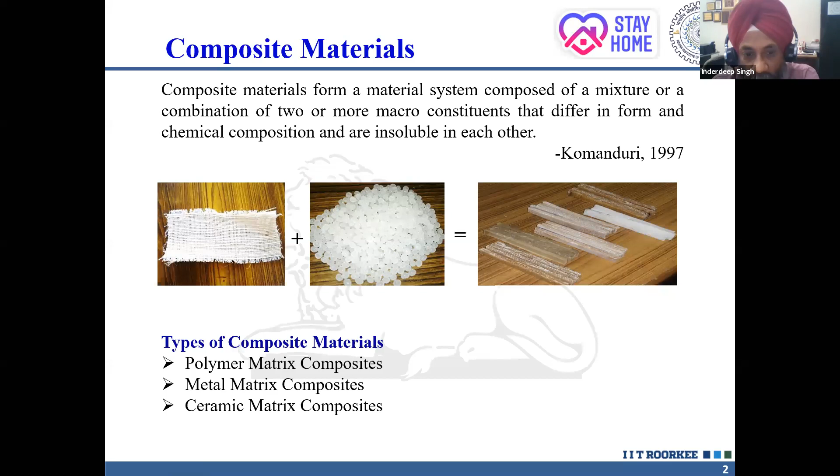So our talk is related to polymer matrix composite, and as I told you, there will be a reinforcement and a matrix. Matrix is of three types, that is polymer, metal, and ceramic. Reinforcement can also be of different types: continuous fibers or short fibers. So for any composite material, we will have a matrix and a reinforcement. Since our focus is on polymer matrix only, we have further classified the matrix as thermoset matrix and thermoplastic matrix. We can choose any one of these, and the reinforcement can be carbon, glass, and Kevlar.

Now the problem here is that the composites that we make from here are going to be synthetic, meaning artificial composites, because the polymer is non-biodegradable, not environment friendly, and the fibers being used as reinforcement are also not environment friendly. So this is a big challenge: how to convert these synthetic fiber reinforced composites into natural fiber reinforced composites that you see on your screen. So we are now trying, at IIT Roorkee, to develop natural fiber-based composite materials.

So we can either have partially green composites or fully green composites. Fully green composites will help you to get fully biodegradable materials. For example, there are already flower pots available. The flower pot has a sapling of a flower plant. You take it home, you dig and put it there. This plastic body of the flower pot will automatically degrade into the soil. So that is the concept with which we are working. These materials are already available, but there is still a lot of opportunity to work in this field to bring them into the structural domain, so they can be used for structural applications.

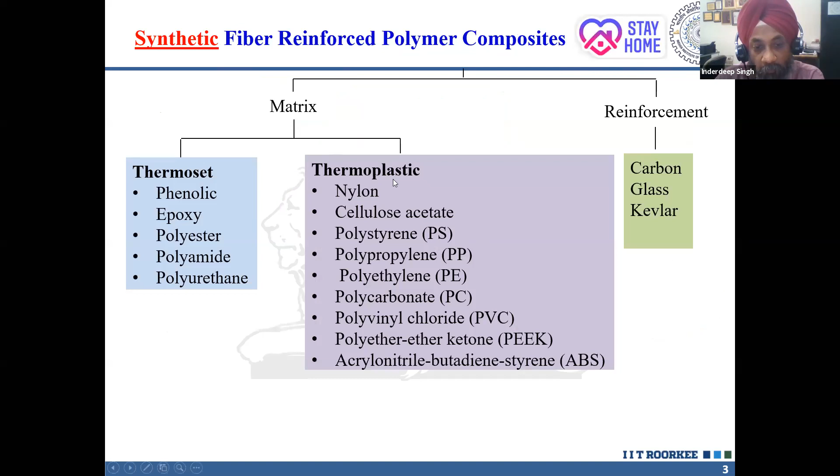So therefore, we have fully green composites where natural fibers are used with biodegradable polymers, and partially green composites where you have natural fibers in non-biodegradable polymers. All the polymers mentioned in the previous slide are non-biodegradable. So if you have a non-biodegradable polymer and you use natural fiber as reinforcement, at least you are reducing some burden of plastic on the environment. So we call them partially green. But if your polymer is also green, that is, it is a biopolymer, and the fibers are also natural, then you can develop fully natural fiber based biopolymer composites which are fully green.

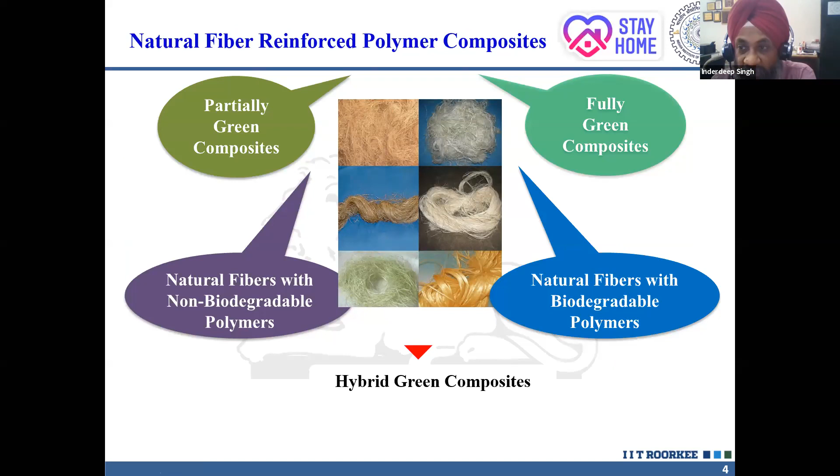So this will further explain the concept. You can see you have synthetic fibers and non-biodegradable polymers. So if you blend them, since for every composite material there will be two things: one will be the polymer, the other will be the fiber.

So fibers are also synthetic like glass or carbon. Polymer is also a thermoset or a thermoplastic, but it is again synthetic. So if you combine the fiber and the polymer together, you will get non-biodegradable composite. But if you combine natural fibers with biodegradable polymer, you can get fully biodegradable composites. So the trend is towards moving from non-biodegradable composites to biodegradable composites, but this may not be a very smooth transition. It can be slowly, step by step.

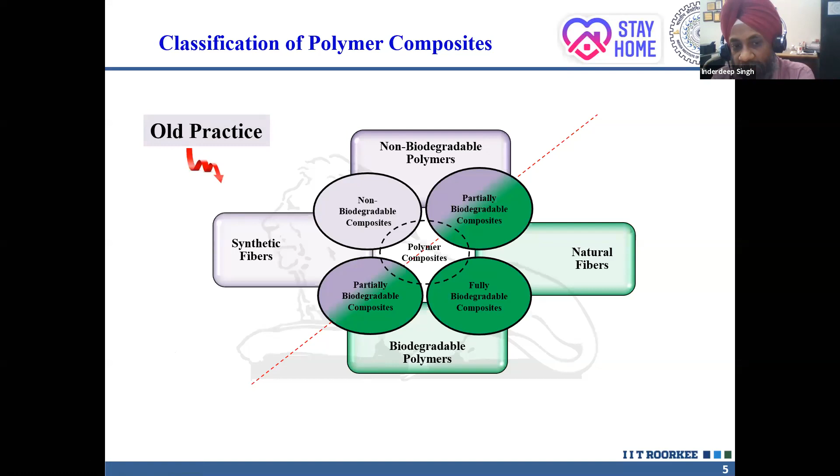So this was the old practice. Most of the aircraft parts that are made by composite materials use the synthetic fibers like glass and carbon, and they use polymers like epoxy or polyester or polyether ether ketone. So different types of polymers are used and different types of synthetic fibers are used, but the main challenge is the biodegradability or the decomposition or the waste disposal of these materials.

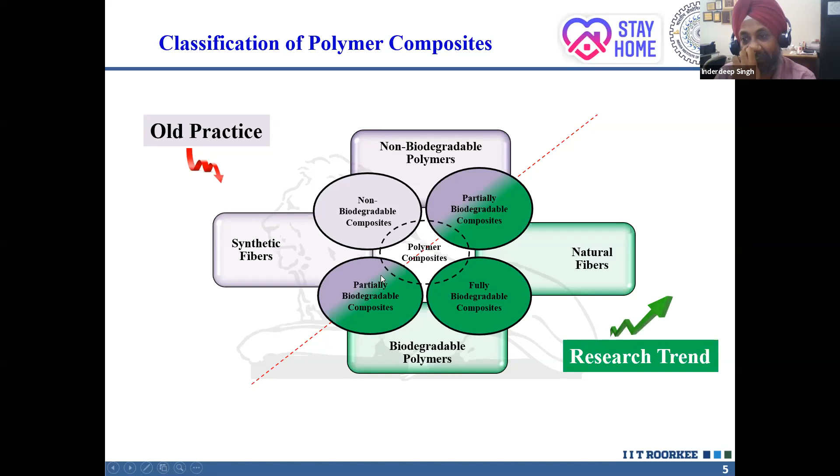But slowly now the trend is towards the fully green composites. So this is the research trend, and we at IIT Roorkee are also focusing our attention in this direction. So these are some of the machines that we have. Very quickly, I will share the information with you. Then we will jump on to the main topic, that is drilling. Already, I think I have spent around 18 to 20 minutes.

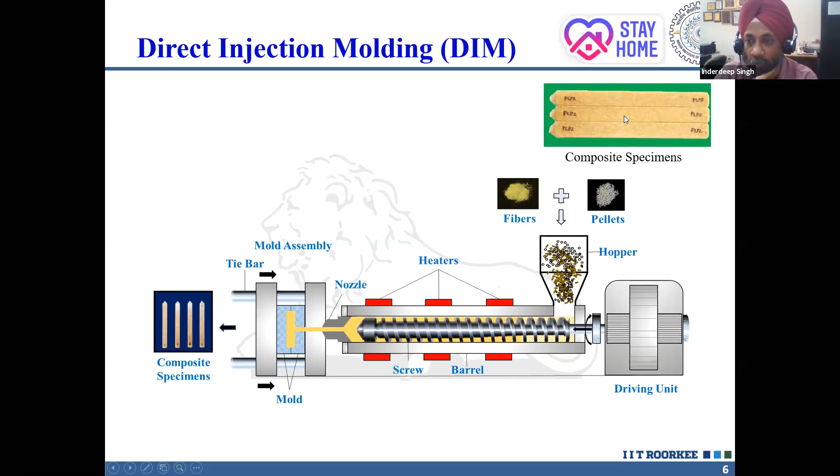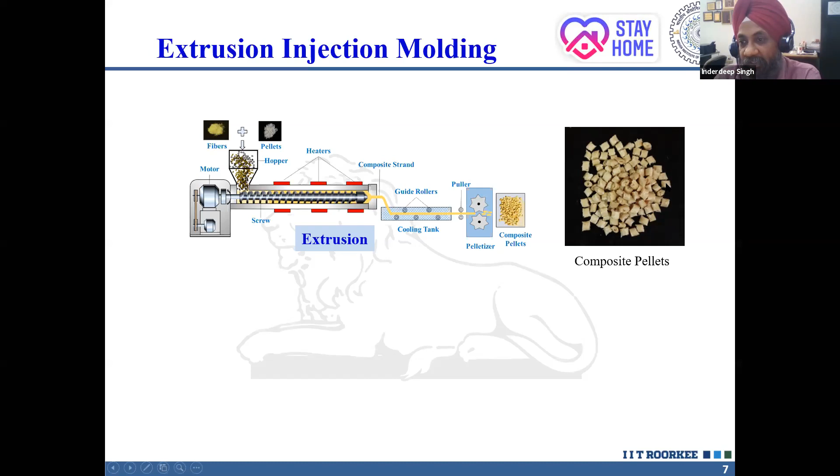Now, why this is also related to CNC programming, because here also there is a controller and there are codes in the injection molding machine that we have to program so that we are able to properly select the mold opening time, mold closing time. We have to see how much temperature we have to set, and the barrel is a long barrel, so we have to establish a temperature gradient in this barrel. So at different sections we have to control the temperature, and we have to define a temperature profile through which these pellets will be melt blended once again into the composite specimen. So it is also related to control. The control procedures are again the numerical controls only. So extrusion process is more of a manual controlled process, the machine that we have, but injection molding is controlled through a controller.

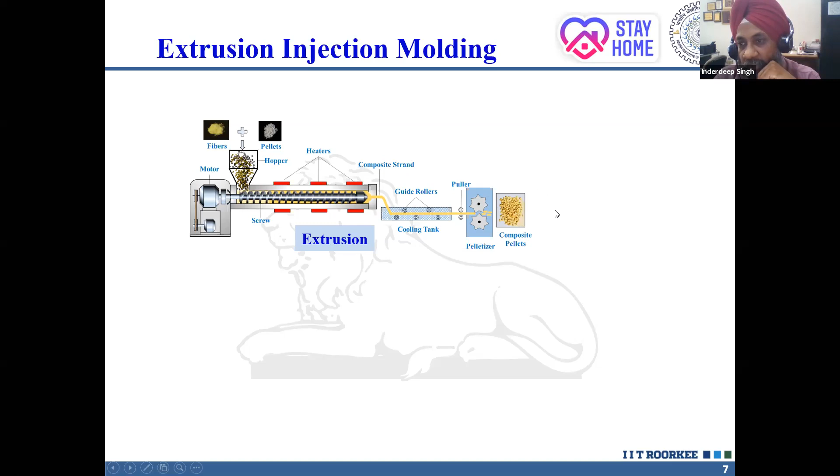So in extrusion injection molding, we extrude and pelletize, and then use the pellets as the raw material for the injection molding machine. Whereas in compression molding, we collect this composite strand in a preheated mold, and then that mold is taken to the compression molding machine and we compress it under temperature and pressure.

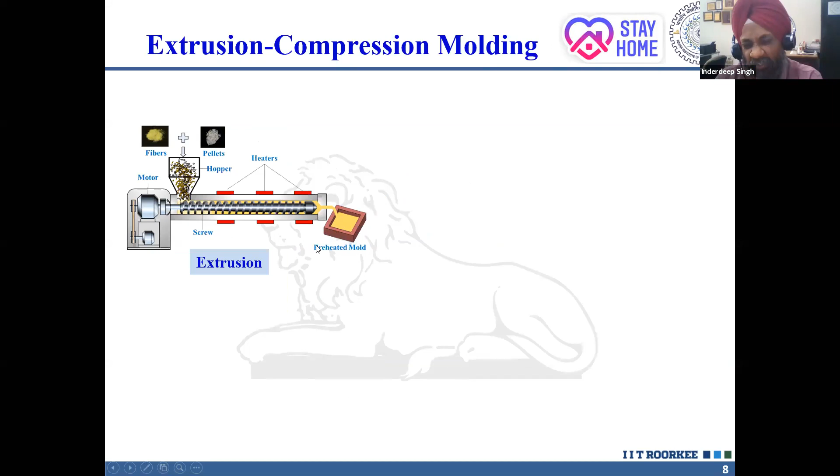So quickly I'll take you to the next slide. You can see here there is no cooling arrangement, there is no pelletizer. The composite strand being extruded is collected directly in a preheated mold, and this mold, sorry, this is extrusion, will be taken to the compression molding machine here.

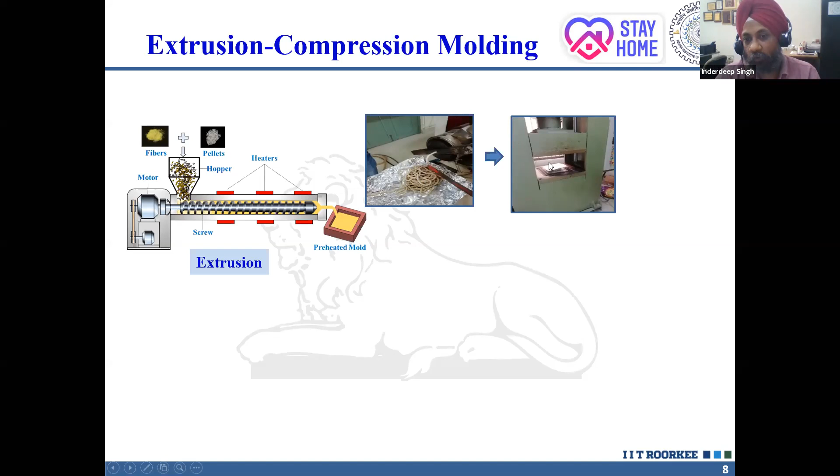This is the material coming out of the extruder, and it is collected in the preheated mold. So this already has fibers and polymers. This is taken to compression molding. We compress it under prescribed temperature and pressure, and finally we get a composite plate like this.

You can see further, this is the mold. Schematically, this mold is directly transported to compression molding, and here the material is compressed under pressure and temperature to get a composite plate like this. So till now, in the 20-25 minutes, I have explained how composite materials can be made.

Once the composite materials are made, they will be used for certain applications. Suppose this plate is made; it can be used for an electrical board, which is normally made of wooden waste or wooden powder. So it can be used for such laminates, or as the back support of mementos. As you can see behind me, there are a number of mementos using wood. This material can easily replace the wood, and any colored printing or golden patch can be pasted on it by cutting a slot. So these materials are now going to be used for specific applications.

But once you use these materials for specific applications, you need to cut them and make holes in them so they can be assembled properly. That knowledge is still being developed, how to make good quality holes in composite materials, because it is not always easy to make holes even in metals; there are many high strength, temperature resistant metals in which cutting is a problem. For example, making holes in titanium or Inconel is difficult. So different processes like EDM or ECM can be applied.

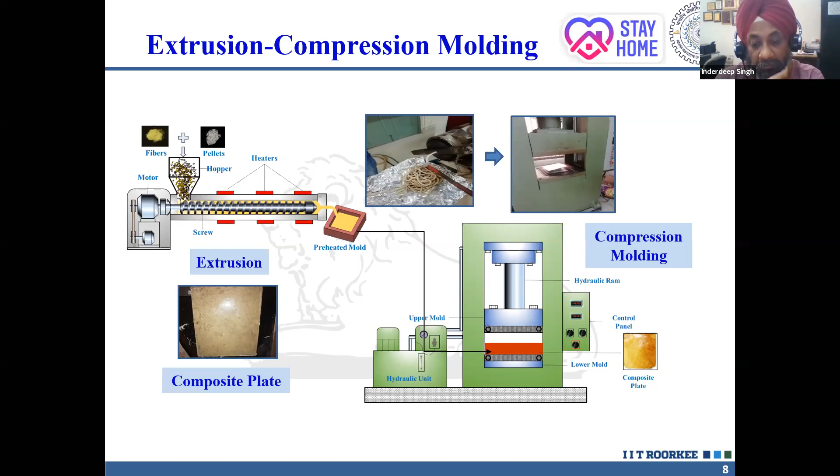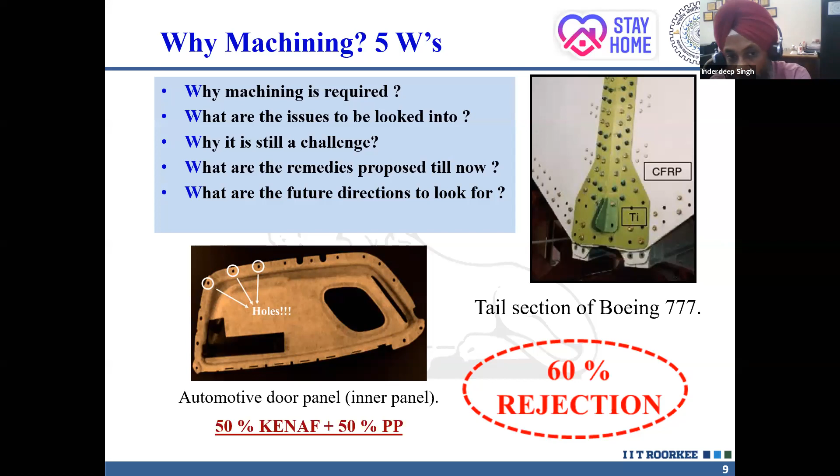Now, making of holes in composite materials is a big challenge. Why? Because as you can see, composite materials are anisotropic. Their properties are different in X, Y, and Z direction. Why? Because the fibers are running in one direction, they're running in another direction, and in the third direction, the Z direction, we have different layers of composite material. So normally in the aircraft industry, laminated composites are used.

Maybe to just have a break, I will show you. I have one sample here. You can see there are different layers which have been stacked together to make this composite, and if you see it closely, I will show another one. You will be able to appreciate this is a composite material, and if I bring it closer to the camera, you will be able to see that there are fibers running in both directions. Fibers are in the longitudinal direction and also in the transverse direction.

So it is light in weight composite material. So you can appreciate the fibers running in both, and in the Z direction through the thickness, there are different layers of the composite. So you have different layers and you have fibers in both X and Y plane. So therefore, making of holes in these materials becomes a challenge because of the anisotropy.

Second is the properties are different. In the very first slide in today's session, I told you that there are the macro constituents, that is the reinforcement and the polymer, both have chemical properties different from each other. Their physical properties are also different, their thermal properties are also different. So how they will behave under the application of temperature is also different. So therefore, the difference in the properties of the constituents is also a big challenge.

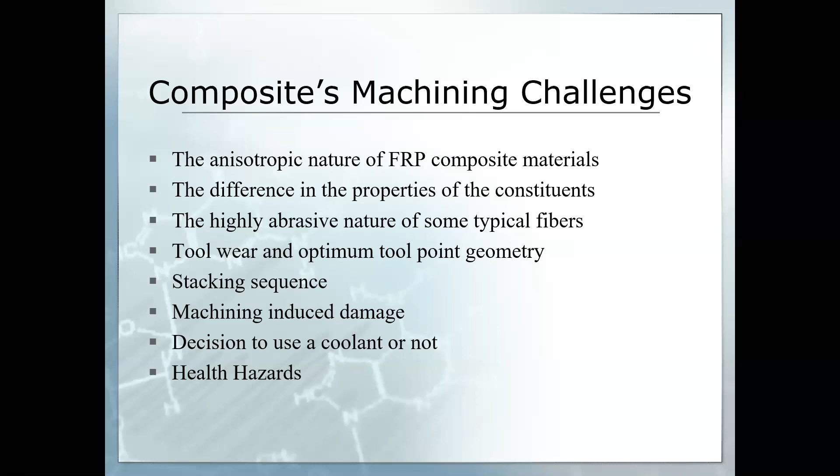So once the designer provides us with the design of the composite material and the stacking sequence is known to us, then we have to first make the laminate, and then we have to make holes in it so that it can be assembled to any other metallic or a non-metallic part. And at that time we will encounter that there is a lot of damage that is happening. So now I am introducing the second point that we are going to talk about.

First is the composite material, second is making of holes in composite material, and third is how we have tried to solve this problem using a knowledge based approach. So the other two parts I will skip because they are not that important.

First is the decision to use a coolant or not, because here you will not experience a lot of temperature rise, as well as you will not use a coolant for flushing out the chips. So normally we have to decide whether to use a coolant or not, because polymer is also a form of a chemical only, and the coolant will also have some chemicals, so there may be a chance of reaction between the two. And similarly, there are health hazards also associated.

When I told you that once you are making a hole in glass fiber based composite materials, the dust may fly after the cutting action, because the chips that are produced are normally in a very powdered form, so there are chances of inhaling that, so that is kind of a health hazard. All these are the challenges which we have to see and we have to address.

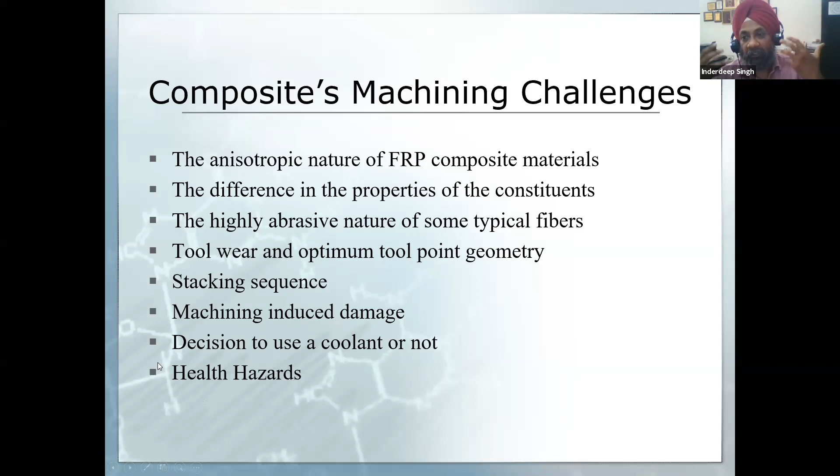Similarly, if we are talking about a CNC machine, we have a cover board or a door which will close, and then the action will take place. So automatically it will take care of the health hazards. So now none of the dust will fly, so the worker will be safe, especially in case of CNC machines. So these are further the challenges as the summary of what we have already done.

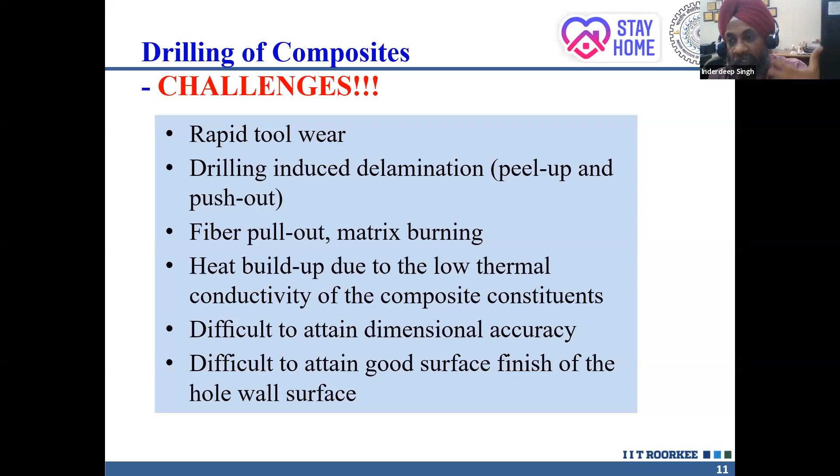It is difficult to attain dimensional accuracy because of the fiber pull-out and sometimes chipping of the matrix, which is brittle in nature. That can also affect attaining a very high dimensional accuracy in the holes that are produced. And the surface finish of the hole wall is also sometimes a challenge, because the fibers are protruding out from the hole wall and we are not able to get a good quality hole.

So whatever I have been speaking, this is a very important slide to explain that. You can see here that, as I told you, composite materials are normally made in layer by layer form, stacked up one on top of the other. I have already shown you a laminate like this. I will bring it close to the camera. You can see that there are 4 layers in this. May not be clearly visible, but this is the width, this is the thickness, and this is the total length of this sample. So you have different layers in this, which are depicted on the screen.

These are the layers. So once the drill tends to enter this, the top layers tend to peel up because of the drilling force action. So with the peeling up action, when the drill is trying to enter into the plate, the top layers tend to open up. That is called the peel up type of delamination.

Now why is the word delamination coming? Because we have laminated different layers together. One layer, second layer, third layer, fourth layer, fifth layer, sixth layer. So we have stacked up the layers. So we have taken suppose 6 layers and we have laminated them to make a laminate. So once you try to make a hole, the top layers may tend to open up. So that is called the peel up type of delamination.

But the major challenge is the push down type of delamination, when the drill tends to exit from the laminate. The bottom layers try to open up under the thrust force that is exerted by the drill on the laminate. So therefore, once this delamination takes place, bottom layers tend to peel down or push down. Due to push down delamination, it is reported that 60% of the holes are rejected.

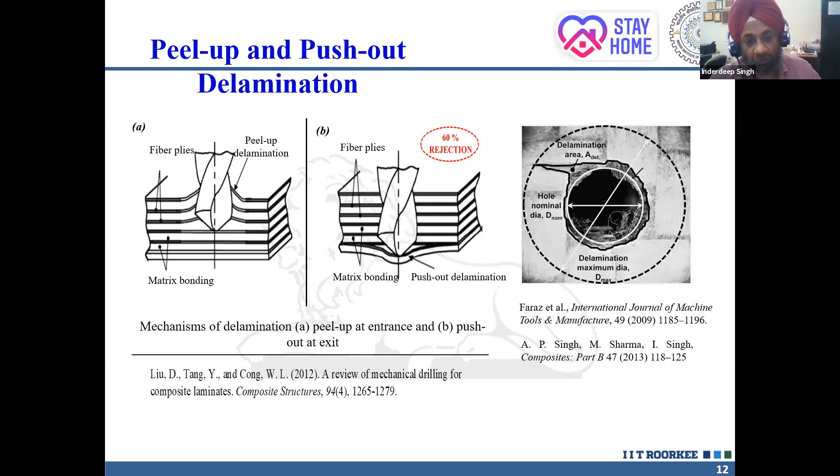The thrust force will be recorded through the setup that I have told, so that continuously the dynamometer will keep on recording the thrust force and the torque, and in the controller this thrust force will be compared continuously with the critical thrust force, and we can fix a limit that the thrust force recorded during the making of hole in the composite material must not exceed a value 20% lower than the critical thrust force.

Now suppose the critical thrust force is 100 newtons. I am just making a guesswork. Critical thrust force is 100 newtons, as we have calculated using any of the critical thrust force models. It is already inbuilt in our controller. Now continuously when we are making a hole, the thrust force is being recorded, and suppose the thrust force recorded is 78. No problem, the process will continue.

But as soon as the thrust force reaches 80, we have pre-programmed it that automatically a feedback signal will be sent by the controller to the feed control mechanism in the machine, and the feed rate will automatically be reduced. So it will be a closed loop feedback system in which your thrust force generated is controlled against the critical thrust force, and as soon as it reaches the level 20% below that, automatically a signal is generated and the feed rate is adjusted automatically.

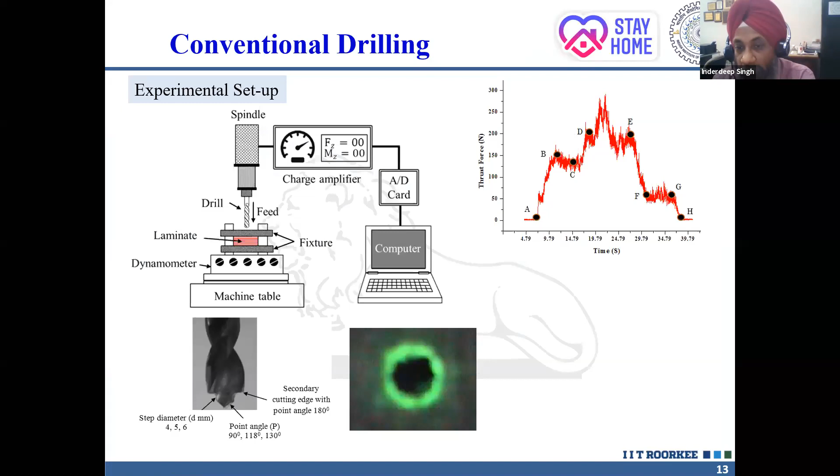So therefore, again I'll go here, what are the approaches people are trying. They are trying to optimize the cutting speed and feed rate, they are trying to optimize the tool geometry, and theoretical modeling is being done. Critical thrust force models are being developed, which can be used as a reference to control the feed rate and speed during the cutting action using the CNC machines.

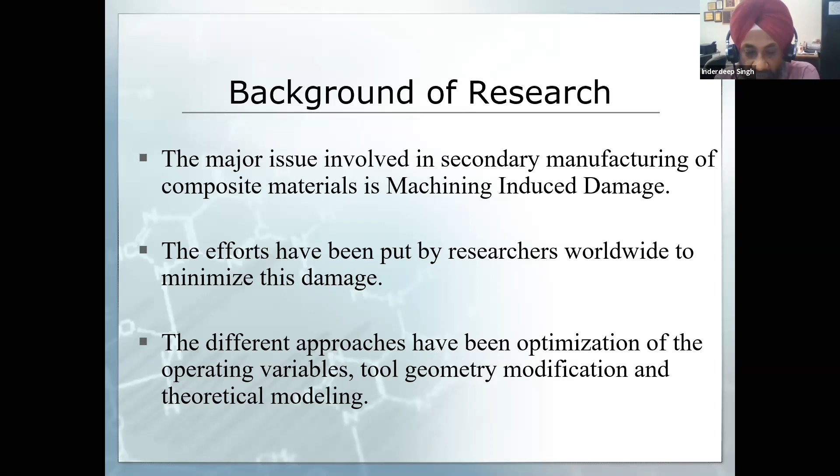That facility is not available with our conventional machines, because in conventional machines, once you set the feed rate, all through the drilling cycle the feed rate will be constant. But in a CNC machine you can program your cycle in a way that initially the feed rate is different, and towards the end of the drilling cycle the feed rate is different. We can have a variable feed rate throughout the drilling cycle. So, again I have told you, different drills we have used, parabolic point and four facet, but how to avoid damage already I explained.

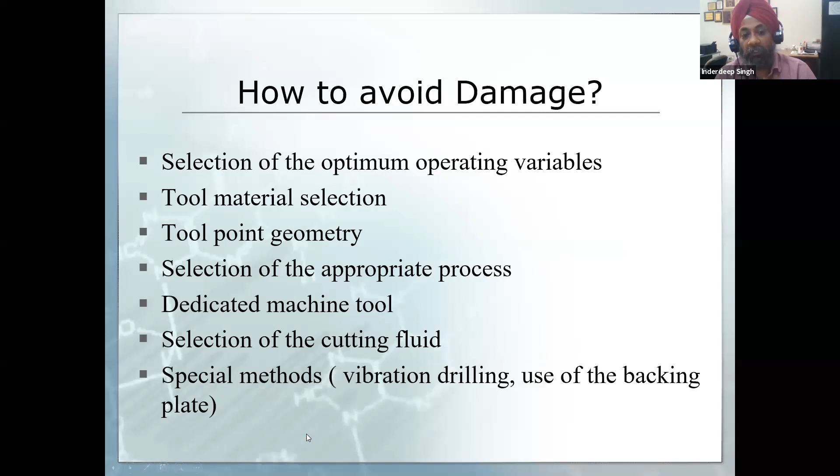So what is the need of a knowledge base? Now research efforts are there, but their efforts are such that somebody has selected a specific fiber, a specific polymer. For example, the researcher has selected polyester as the polymer, and glass fibers as the reinforcement. He may use hand layup process to make the composite plates, and then make holes in those plates, record the forces and explain the trends of the forces, optimize the drill point geometry, and publish a good paper in a good journal.

So that information is available through the journal, but that information is specific to that experimental domain which was followed by that researcher. The fiber was limited to glass fiber, the polymer was limited to polyester, the cutting speed and feed was also in a specific domain, the tool point geometry was also limited, it was one or two only. So the same results cannot be directly applied to any other material. Suppose I keep the glass fibers the same, but I change the polymer from polyester to epoxy, all results will change. So the efforts that have been reported are segregated.

You have different pieces of information available. So efforts are largely distributed, but they are successful. So many times, suppose somebody starts to work in this field, he will spend a lot of time reading about all this literature and then compiling the information. So what we have tried to do, we tried to create a knowledge base.

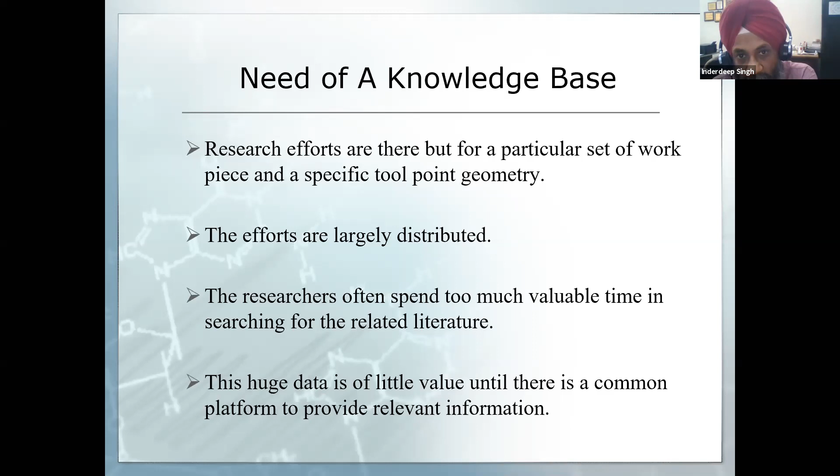So the efforts are largely distributed. The researchers may often spend a lot of time searching the related literature. So this huge data is of little value until there is a common platform to provide the relevant information. So with this objective, we developed a knowledge base to help engineers and scientists with their specific queries related to feed rate and cutting speed.

For example, maybe many of you may ask a question towards the end of my session, how to select the feed rate and cutting speed. So if you put a specific value of feed rate and cutting speed as per the levels or settings available on your machine, this knowledge base will be able to predict what will be the forces generated if you are able to correctly specify the material.

So you specify the material and you give your tentative feed rate and cutting speed, and it will tell you the forces and the delamination factor. If the delamination factor is very high, you can then try to reduce the feed rate and do the iteration. Maybe in 3 or 4 iterations you will be able to get the delamination factor within the limits, as well as the forces also within the limit.

And if your query is matching directly with one of the research papers that is already available and is one of the important pieces of information in the knowledge base, the system will automatically show the reference for that detailed study. I will show you 2 or 3 case studies with the input and the output from the knowledge base.

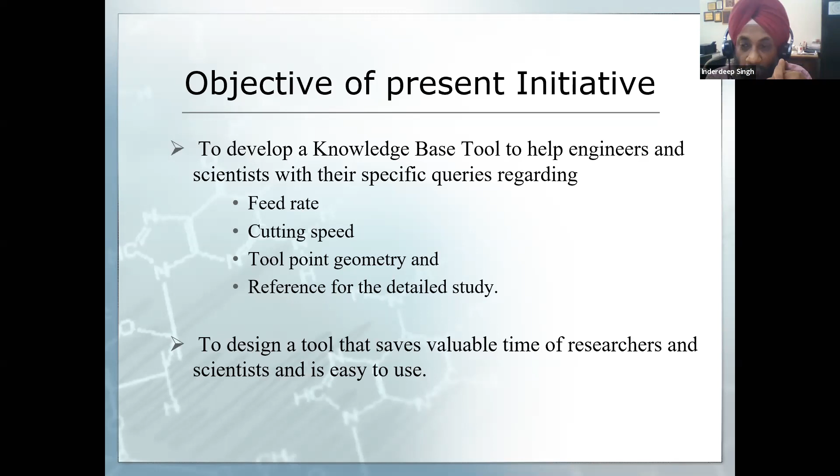So the basic idea behind this knowledge base is to provide a ready reference for the users, so they can directly use the information they have, and the knowledge base will help them take a judicious, right decision related to the optimal selection of the operating variables. So it will save a lot of time for the workers, but the main emphasis of this tool is it must be precise, accurate, specific.

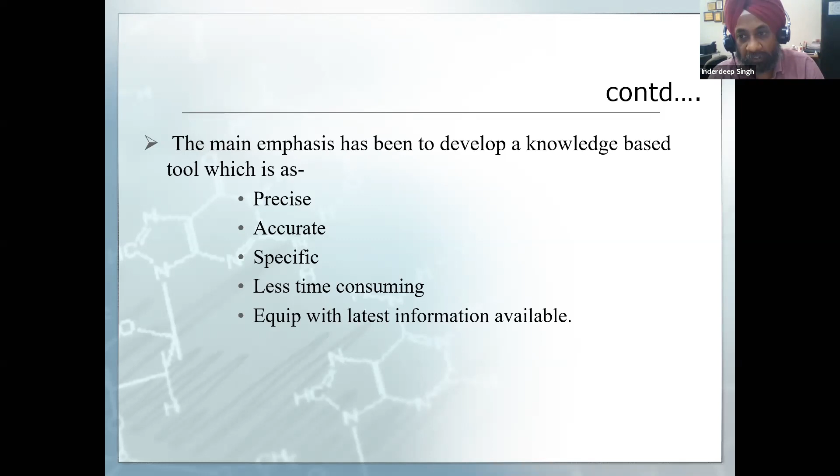Maybe you input your information now and get the output after 2 hours. Nobody is going to wait for 2 hours. Therefore, it must be immediately able to predict the values, and be equipped with the latest information available. So it must be open source, so that as new articles are published and new information is generated, it is updated in this software. So with these objectives we developed it.

The knowledge base was developed a few years back, and now the research scholar who developed it is working as a director in one of the institutes. He used C++ as a coding tool, and all the information was available in the form of data sheets, which were integrated in the program, and then it was able to do the predictive modeling of the drilling of composite materials.

The second point is important because in many cases, in the research papers, you will get an x and y graph. On the x-axis is suppose feed rate and the y-axis is thrust force. So they have not specifically given the values.

So in that case, we used Corel Draw, which is an imaging software, and we were able to extract the values of the thrust force related to the feed rates given on the x-axis from these figures in the different journals, and we were able to use them and integrate them into the knowledge base.

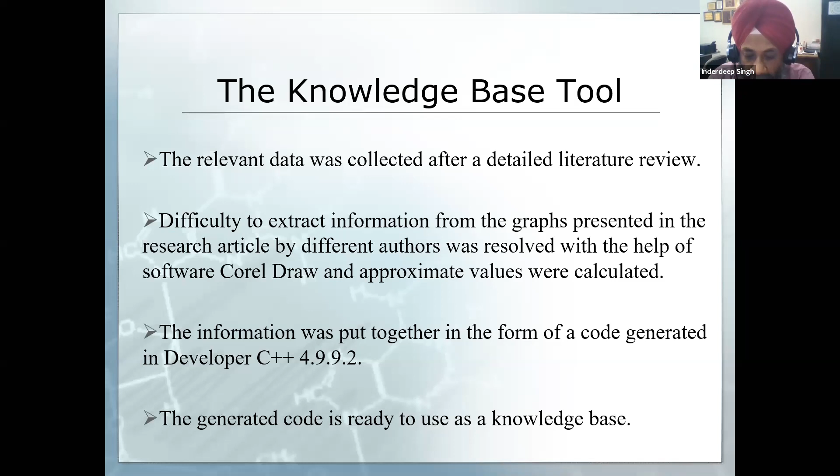Now this is how the knowledge base works. This is I think the last part of my talk today, how it will work, and the 2 or 3 case studies I will be able to share with you on how this knowledge base works.

But before going to that, how it is useful: it can be integrated with the controller of the machine where the person is going to give the various settings. So before giving the settings in the controller, he can just try the iteration and find out what are the best settings in the controller itself, and then once he locates the best setting, he can put the same values for controlling the process or for undertaking the process.

For example, feed rate, he can just see what will be the optimal feed rate based on this database, see the cutting speed which is optimal for minimum damage, and then use those values in the program. And this will be a kind of feedback for writing the program, that you get your information from this tool and then use that information for writing your program.

So how do you do that? In step 1, it will ask the user whether the process that he wants to undertake is conventional or non-conventional. So we have some papers already available on non-conventional machining also. Then it provides options for drilling with special conditions, like drilling with the exit backup plate, under cryogenic conditions, or vibration drilling. So it will ask you whether you want to do a normal drilling or you want to put

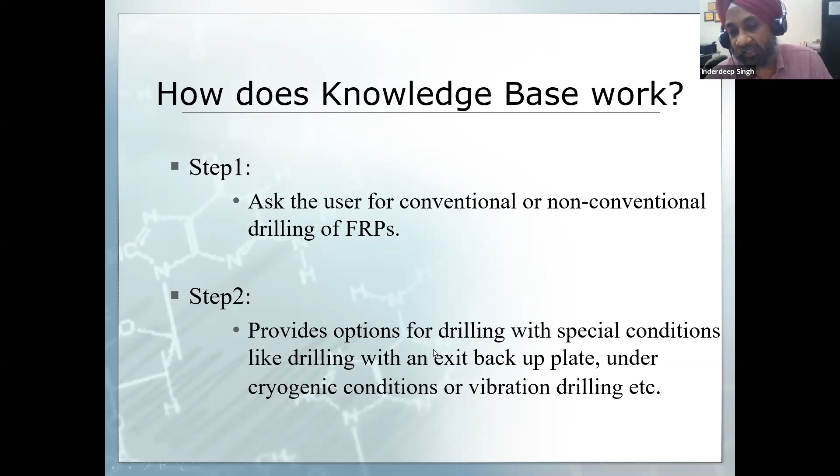So the software will ask you whether you want to do conventional or you want to put an exit backup plate also. Then the material: it will ask what is the material, what is the type of fiber, what is the matrix material, what is the tool you want to use. As I told you, there are 18 to 20 types of drill point geometries which are already investigated.

And then, since now the software knows everything, which material you want to machine, which process you want to use, which tool point geometry you want to use for making a hole, obviously it will display the relevant information or the reference. If there is a direct paper available, it will give you the direct output, that this is the research article which has already done drilling experiments on these materials, and this is the right geometry that you must use.

So we are not giving the links of the papers here, because that is also a kind of infringement; we cannot provide a direct link to the paper. So we are only giving the details of the paper: this is the author, this is the paper, this is the volume number, so this information is available in this paper. So if the institute or the college or the industry has access, they can directly download that paper, or if they don't have access, they can buy that paper. So we are not providing the paper, but we are providing just the information that this information is available in this paper.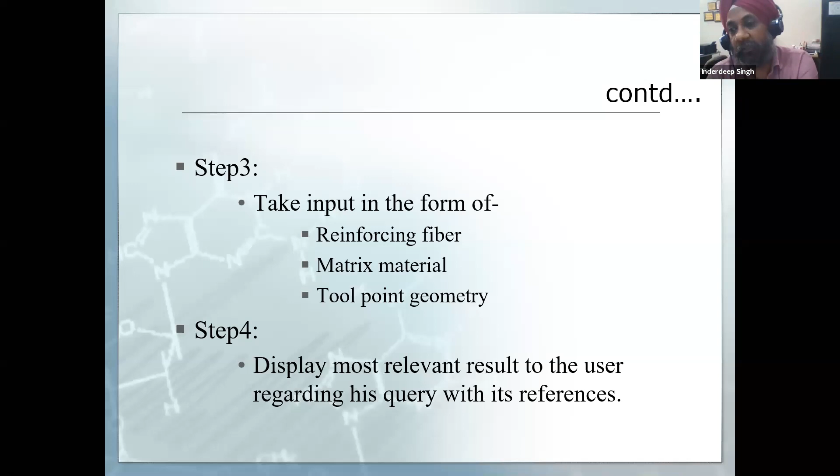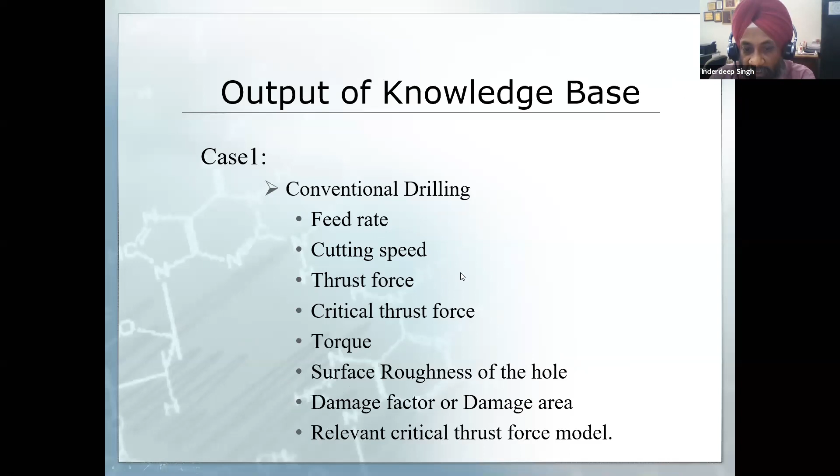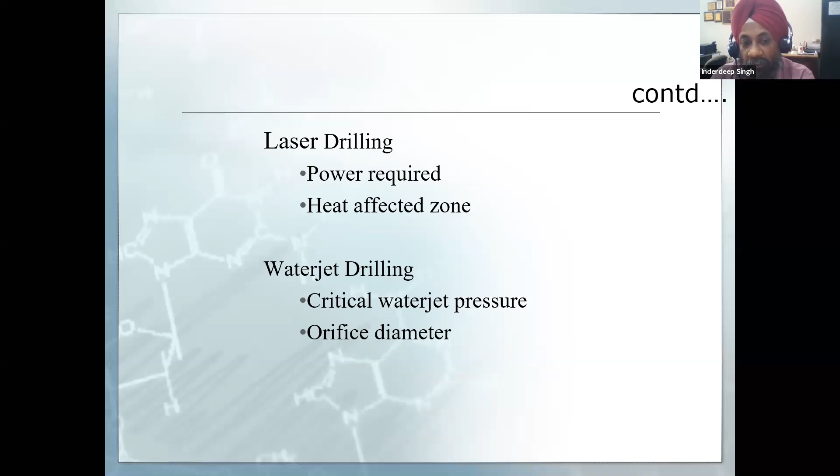Now this is just one case study, output of the knowledge base. In case 1, the engineer selected conventional drilling. In conventional drilling, all this information will be the output of the knowledge base. In case of non-conventional drilling, this will be the output of the knowledge base. Laser drilling, this will be the output. Water jet drilling. I think I am running out of time, so quickly, this is the overview of how it will work.

First question, drilling of fiber reinforced plastic. There is a very beautiful graphic user interface. First you enter, the first thing flashing is drilling of fiber reinforced plastic. The first question it will ask is whether conventional drilling or non-conventional drilling. With conventional drilling, it will ask without special conditions or with special conditions.

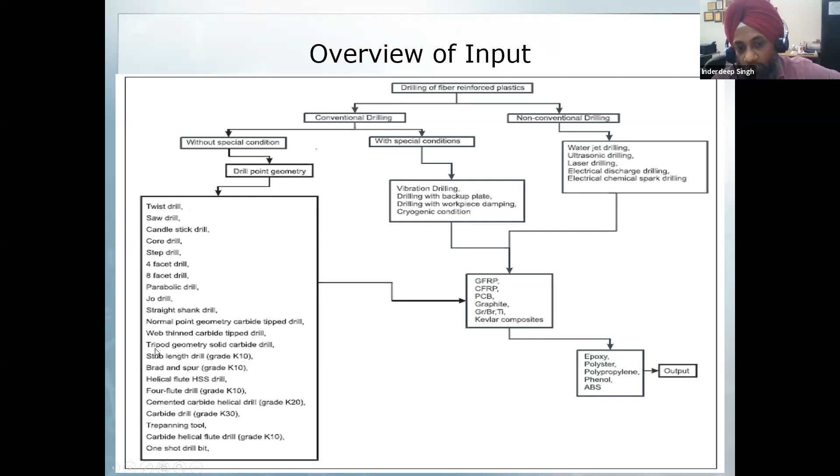If with special conditions, it will ask you further any of these. If none of these, then you go to without special condition. And then you select the drill point geometry. It is a drop down menu. In the drop down menu, click on the drill point geometry, you will get all these drills, because research articles are available for all these drills. So you select the drill point geometry, then you select the material, and then you select the polymer and the fiber, and then it will generate the output.

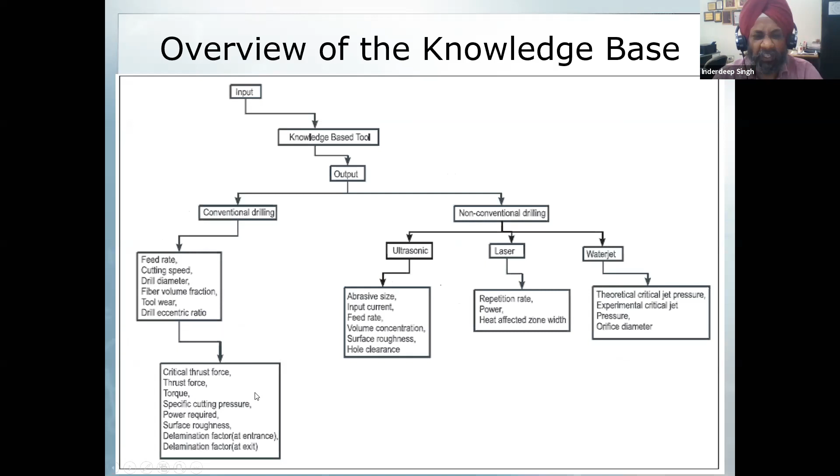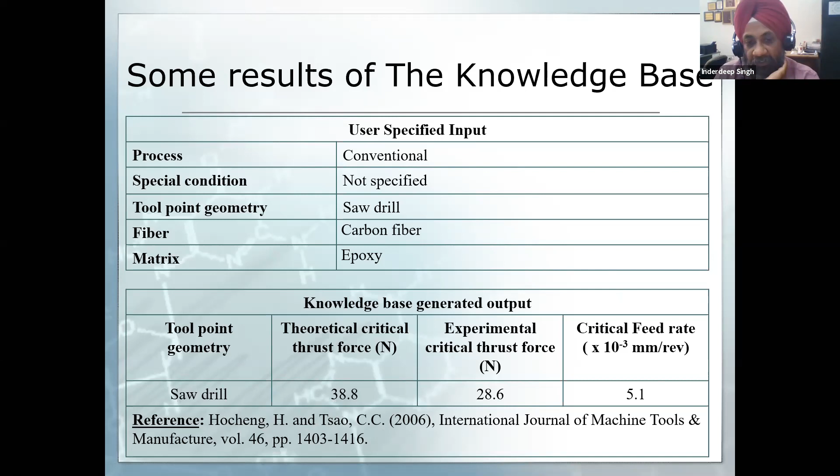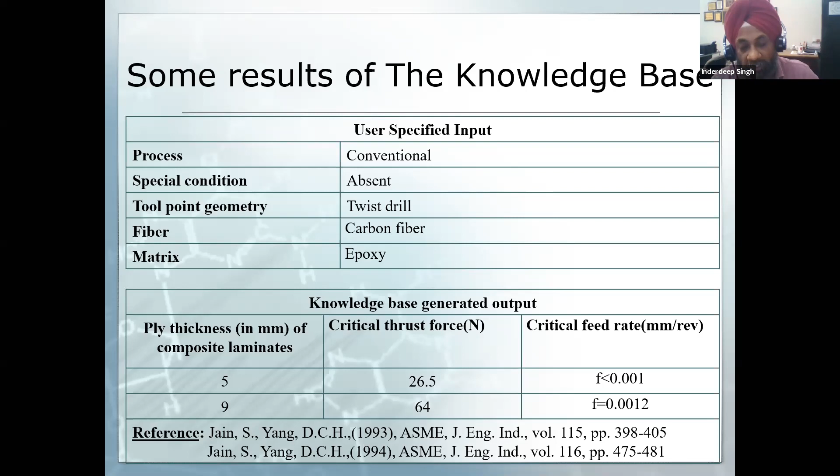So once you specify this, instead of reading hundreds of research articles to match your conditions, this is going to give you a direct output of the conditions along with the information related to the paper, so that you can directly jump onto the right paper and find the relevant condition. So this is important for researchers working in this field, as well as for industry, so they can minimize their efforts in locating the right information to make damage-free holes in composite materials.

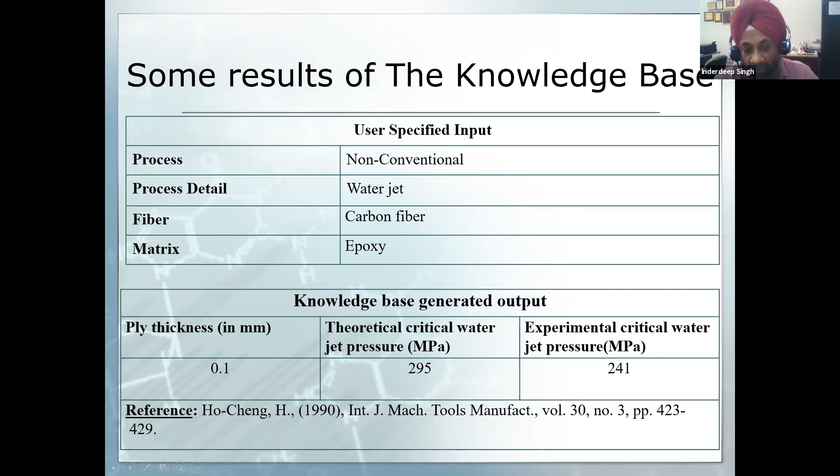So therefore, such type of tools can be useful when we are going to write our programs, and these can be used as an input for our programs for selecting the right kind of conditions which will help us to avoid the damaging effects that the forces or the drilling action may have on the composite materials.

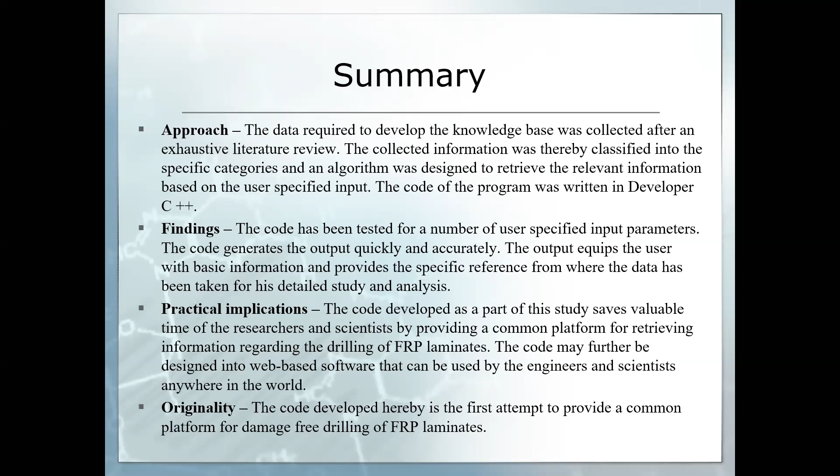Sir, I think it's okay. I think either the participants have understood everything or they have not understood anything. No, actually, sir, both. Participants are satisfied, I think 100%. That's why maybe they are not asking. No problem. This is a good area.

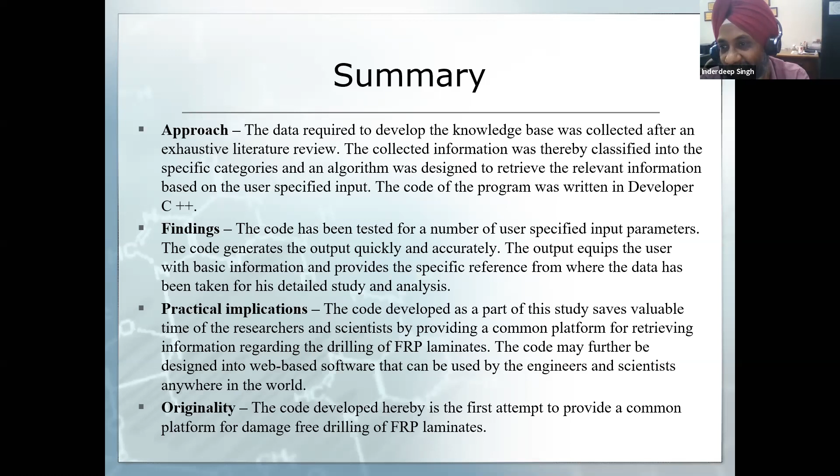Sir, I have gone through your lecture many times, and I am also attending your MOOC courses, and you have done an excellent job for us, sir. Thank you very much. These nice words always help us, motivate us to do even further. We are also learners, so every day I learn. I have learned a lot from you, sir. Thank you for the kind words. Thank you, sir.